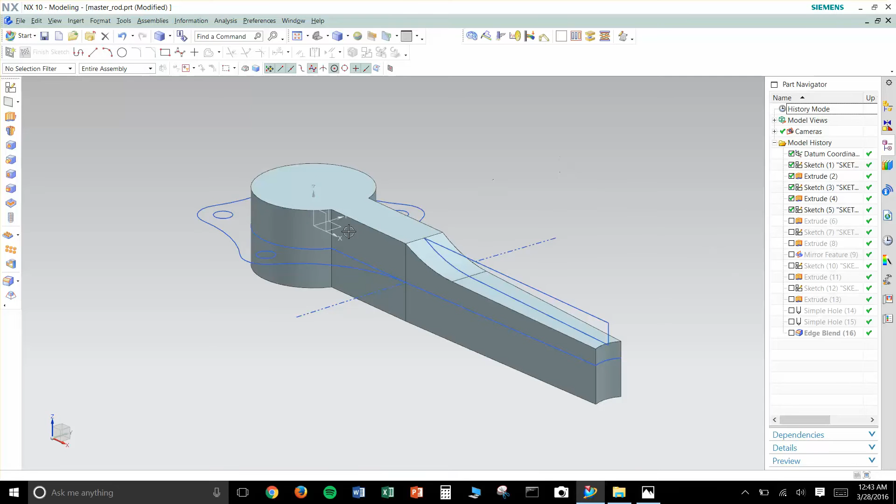Then I draw my third sketch, and this is the most difficult out of all the sketches you have to draw for this piece. But it's really not that bad, I promise. From here, I pretty much catch my breath, and then I just extrude it.

Then I draw this inner sketch, which is embedded in here, representative of this. I subtract that out of this piece, and then I mirror all these things. So I mirror this cut, I mirror this little pocket cut here, I mirror this piece here, and that's what I end up with so far.

And then let's see, this sketch - what is this sketch? I think this sketch is just a circle. And then I go ahead and extrude that. I draw another circle here, extrude that, and make sure - like when I'm extruding these, I'll show you when I actually go through it all - but when I'm extruding these, I'm attaching these pieces to one another by uniting them, so make sure you do that.

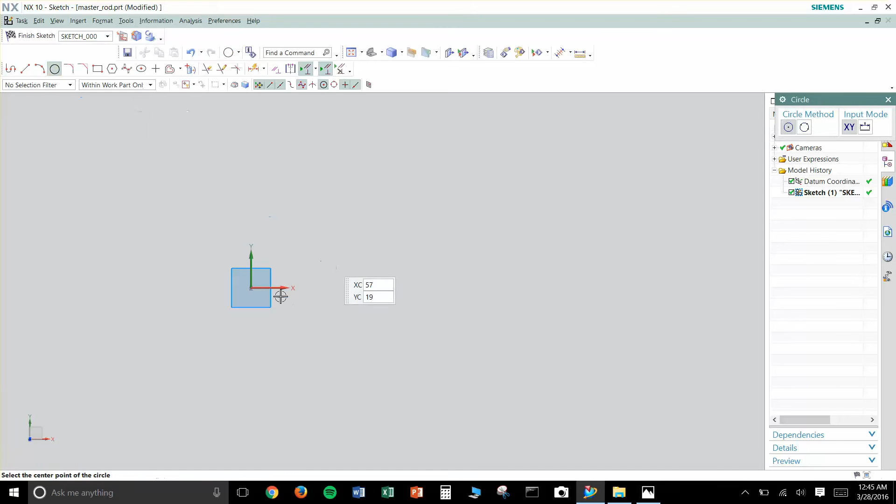If you watch how I do it, it makes things a little bit easier. But depending on how you want to do it, you could do it however which way, but as long as you end up with the same result, that should be fine.

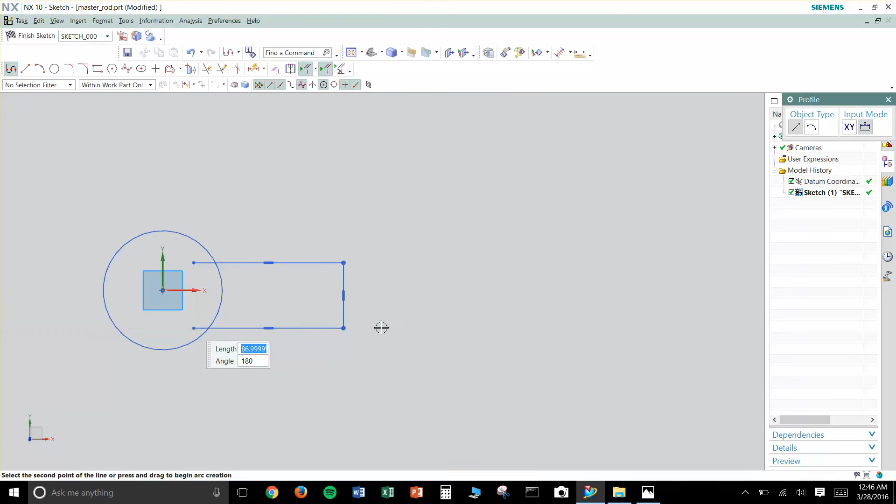So I start with the circle here. I don't put any dimensions on now, mainly because I know once I draw this out, I can change them later on. So all I'm drawing is just a few lines here. And then the last thing I'll draw here is a circle.

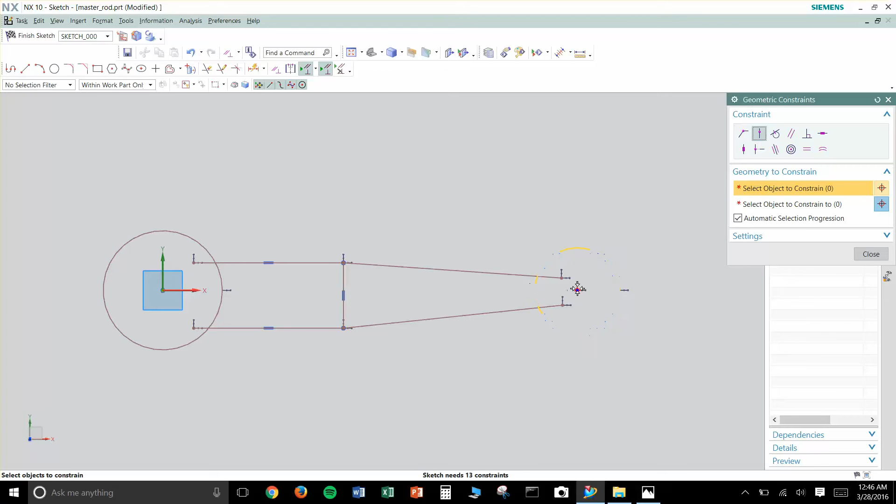First thing I want to do is go into my constraints and get some things aligned here. I want this circle to be in line with this x-axis here, and so it is. Next thing I want is to make something symmetric about each other, so I want this line and this line symmetric about the x-axis, as well as this line and this line.

These arrows that came up a little earlier, they do matter. So you can't select this line with this arrow over here and this line with this arrow over here - it'll mess things up, but if you haven't figured that out already.

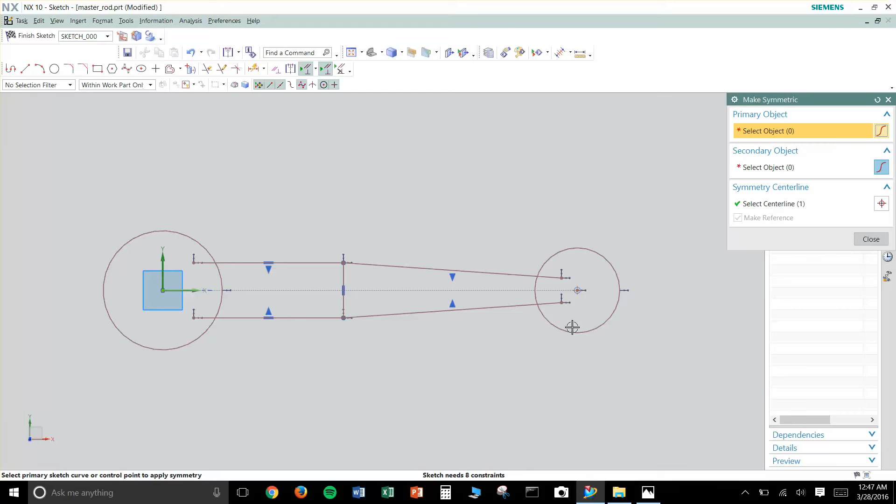And this is where my handy trim tool comes in. You could just hit T on the keyboard and that'll bring it up too. So I don't need that, I don't need that, I don't need this, I don't need this, or this.

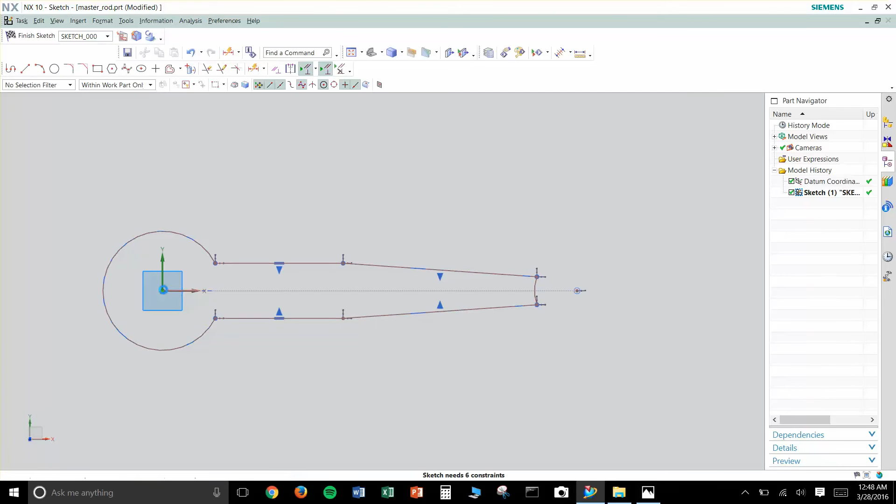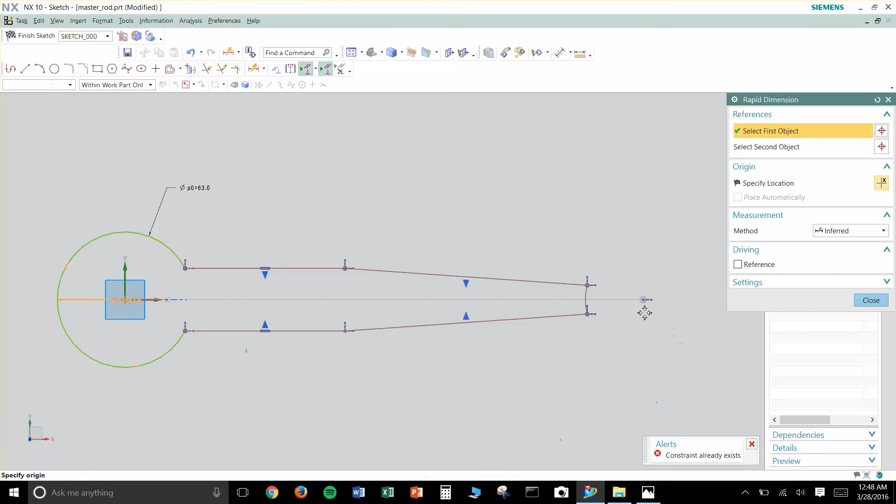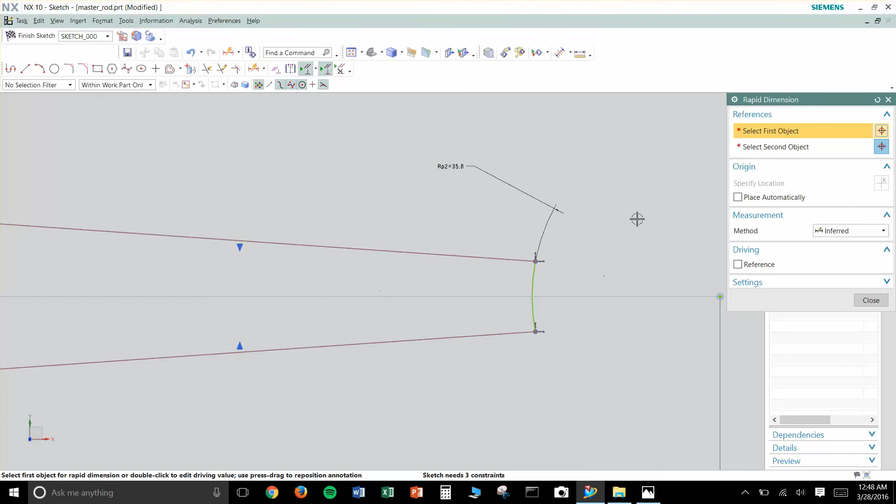I know that this circle that was once here, if I click on this, it'll bring it up. The radius of that circle, here we're given a diameter, so it's just that 35 divided by 2. So literally I'll just type in 35/2, and that'll give me 17 and a half.

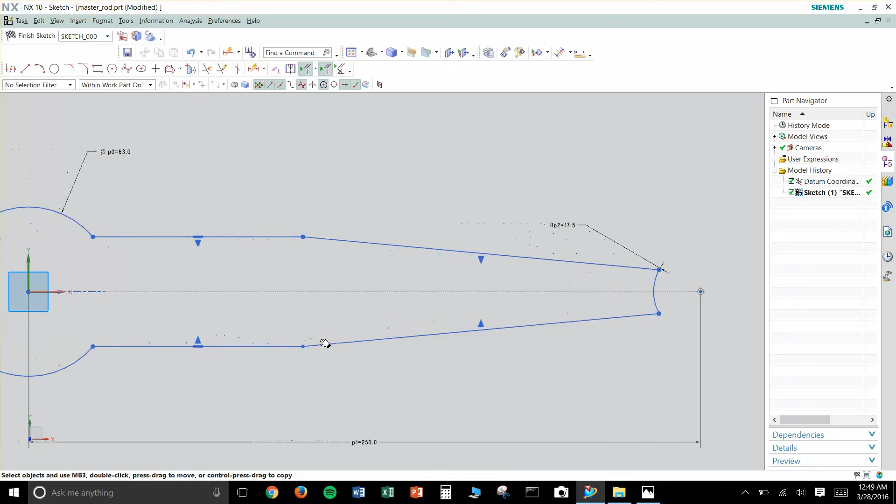Next thing is you can kind of move these apart like how I'm doing, and it might help you eventually, that way things don't go crazy if you apply a dimension. Sometimes that'll happen if it hasn't happened to you already.

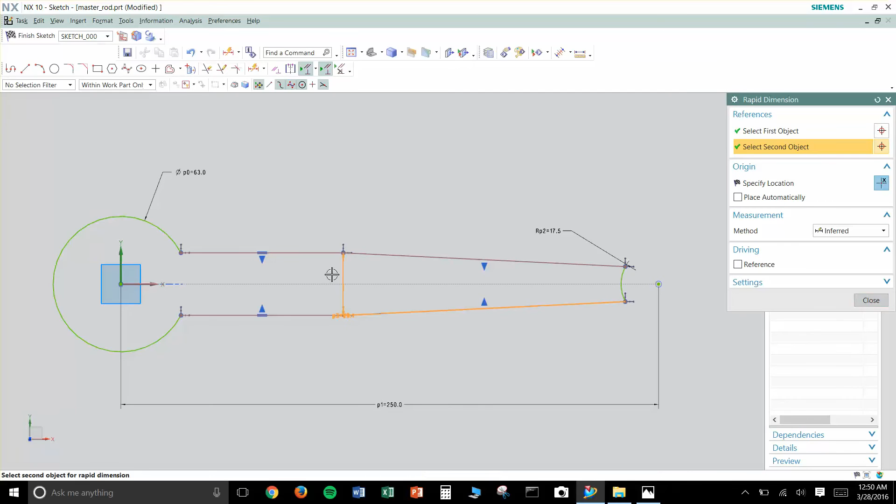The dimension though that I do get, not from the book, is this dimension here, the dimension that gives us this point to this y-axis here. And that I know is not 24... this dimension here, this is 24.

This dimension, like I said, it's not in the book. I really can't remember how I got this 24, but I remember back when I took the class, which was like 4.5 years ago, I was told that this 24 was correct. And I did get a good grade on the Radial Engine, so if you have really big concerns about it, I would go ahead and talk to Jim.

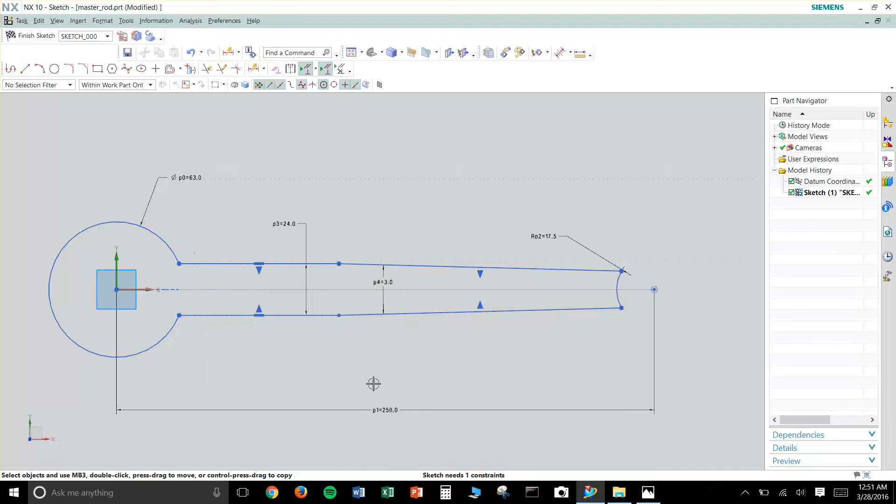But other than that, this last dimension should be 3 degrees. And my last constraint, I think it's that last dimension that I pulled, 88. So this 88 means from this edge here to that center, and that's 88. That means from this point to this y-axis, that is 88 millimeters.

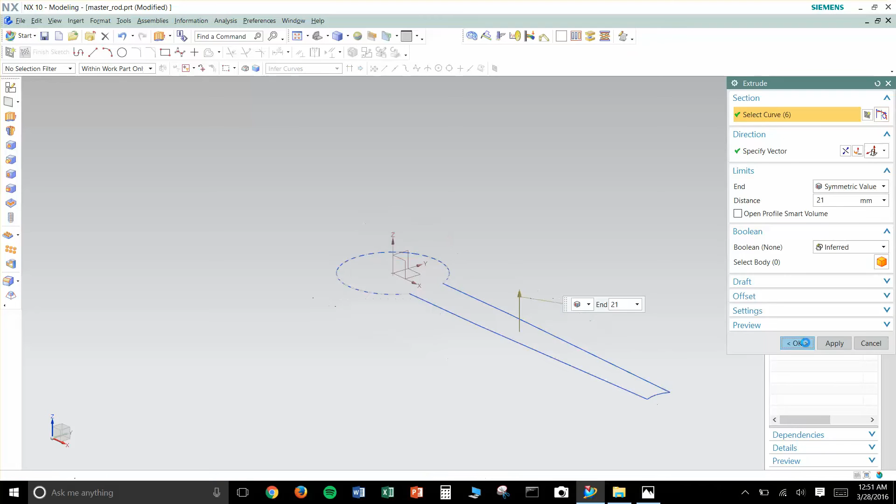And now my sketch is fully described, so I can finish it. I can extrude it. And according to the book, I want to extrude it symmetrically 21 millimeters, because I want the entire width of it to be 42.

And I can go ahead and draw my next sketch. My next sketch is going to be on the ZX plane, and it's going to be like that knife looking thing that's right here. So in order to get that...

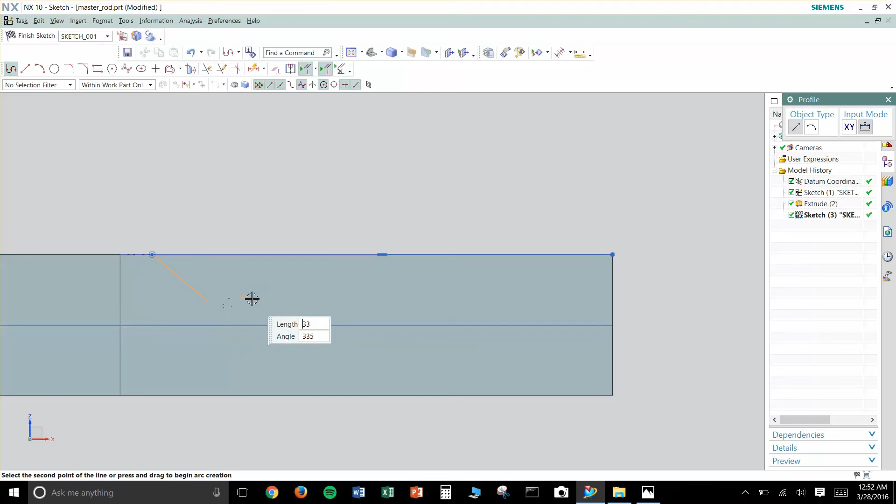I'll start with my profile tool, starting at this corner. I'll come maybe about to right there or so, and then I'm going to back out. And I'm going to use my arc tool, about right there, so I get an arc about roughly looking like this. Oh, that's weird.

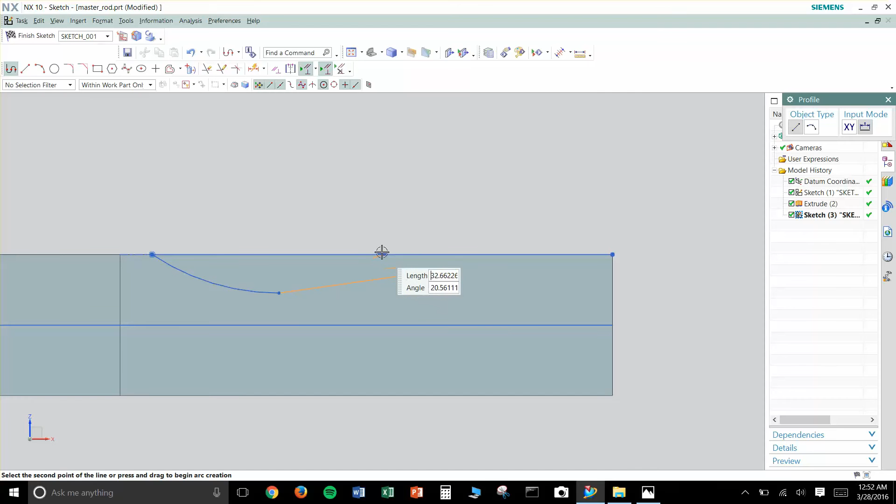Then I'll continue this line, but I want to continue it at an angle. I don't want to continue it straight, because if I continue it straight and click, it's going to make this horizontal constraint that this line has. So I want to make it at an angle like this. For whatever reason it applied it anyway, so I'm just going to delete it and drag it down. Yeah, but right there is good.

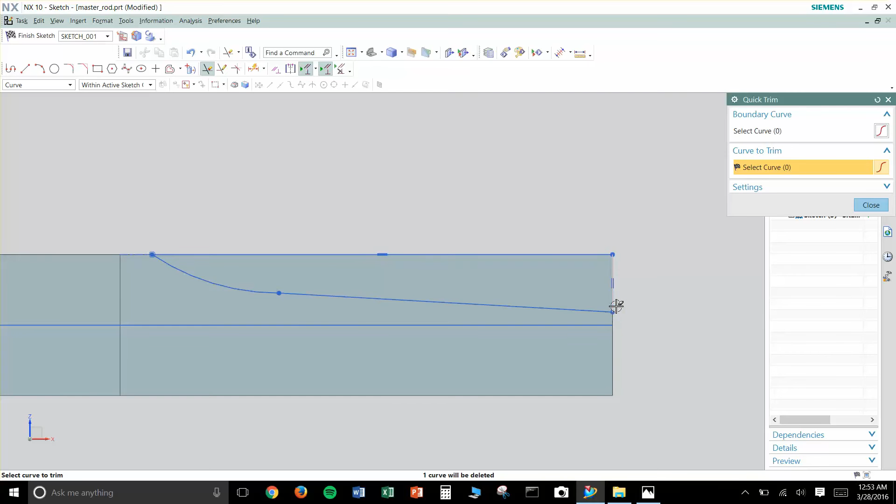I'm going to start from this original point, come down, and then I want to trim this piece and this piece, so now it's kind of closed here. The first thing I want to do is go into my constraints and make this arc and this line tangent to each other. I couldn't remember the name.

So I have that this arc here should have a radius of 78. And I will also use this 2.5 here.

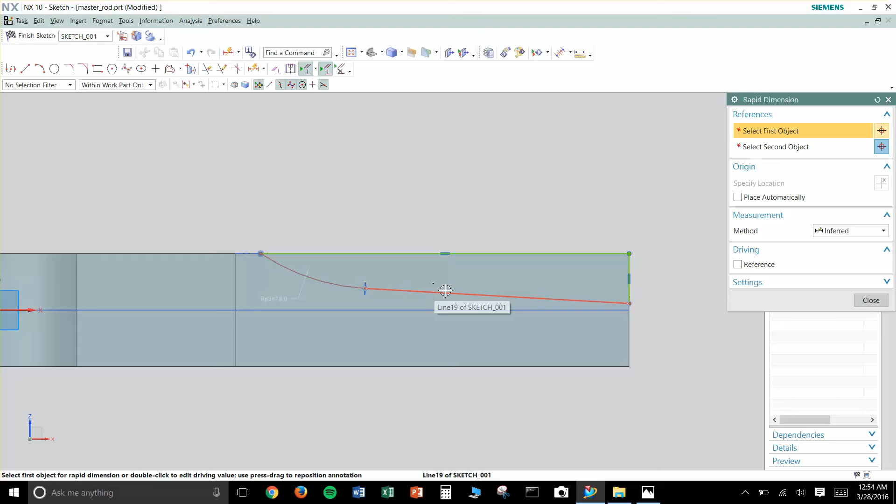So if I make a dimension that pretty much goes from this, an angular dimension, sorry, that goes from this line to something that's horizontal, I can use this 2.5, but this 2.5 describes both sides here. So what I want is half of this 2.5. So it does have a slight, an ever so slight angle to it.

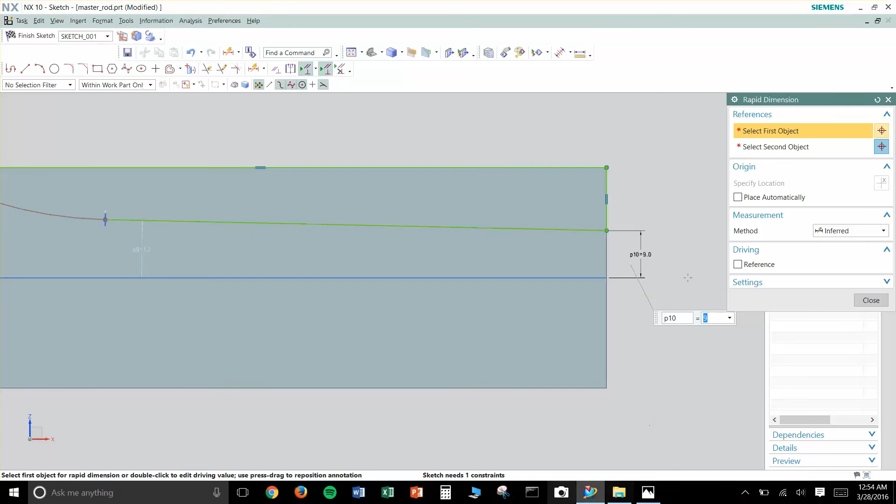This dimension here I know is going to be 9, and I know that from, this was also kind of confusing, but I got it from this here. So I'm kind of assuming that this 18 is described at this corner here. That was another kind of issue with these drawings, and as you know, many other issues occur in the book as a total.

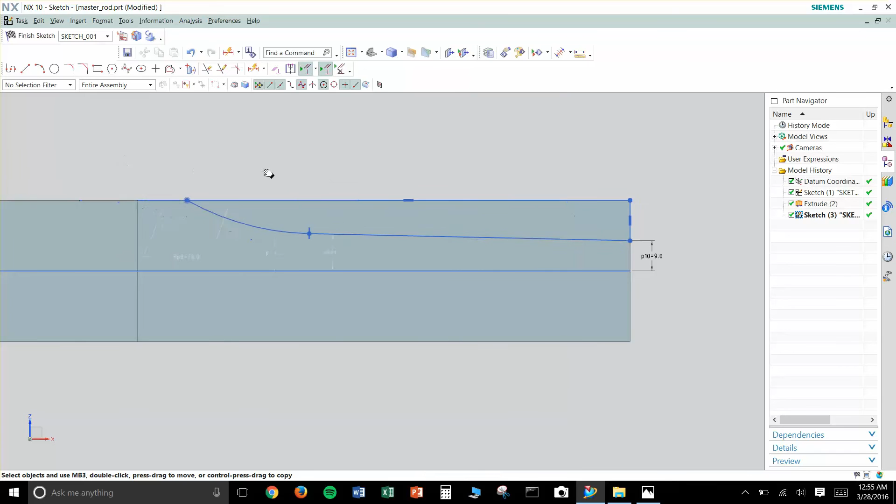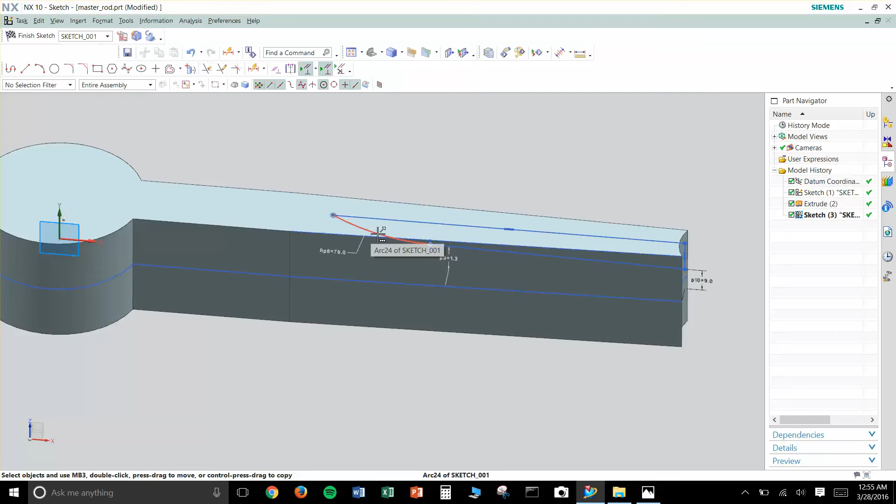I believe this point here, where it starts curving, is the same as that point here where I described the 88 in the last sketch. So what that means is I need to make some stuff coincident. I need to make this point here and this point coincident, so it'll pretty much drag all this left. Once those are coincident, my sketch is fully constrained. I can finish it and extrude subtract from my bigger piece.

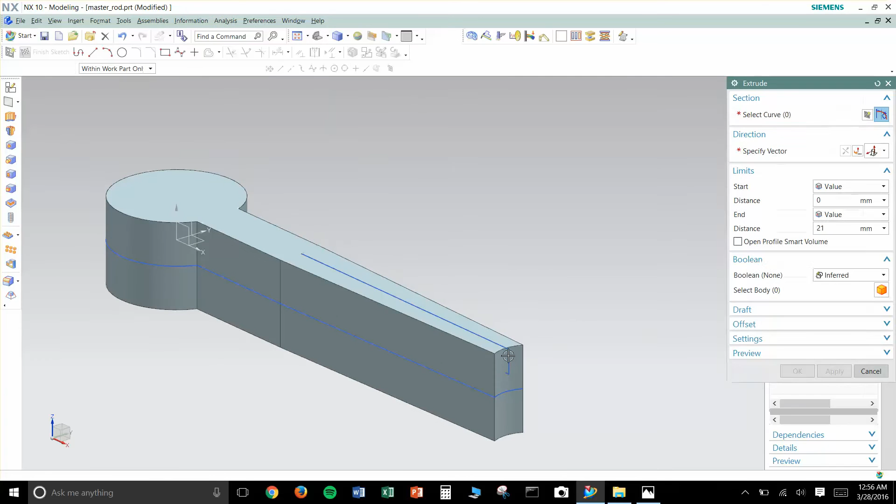This really doesn't matter, right? Because you're just subtracting. As long as you subtract from that main material, that's all that really matters.

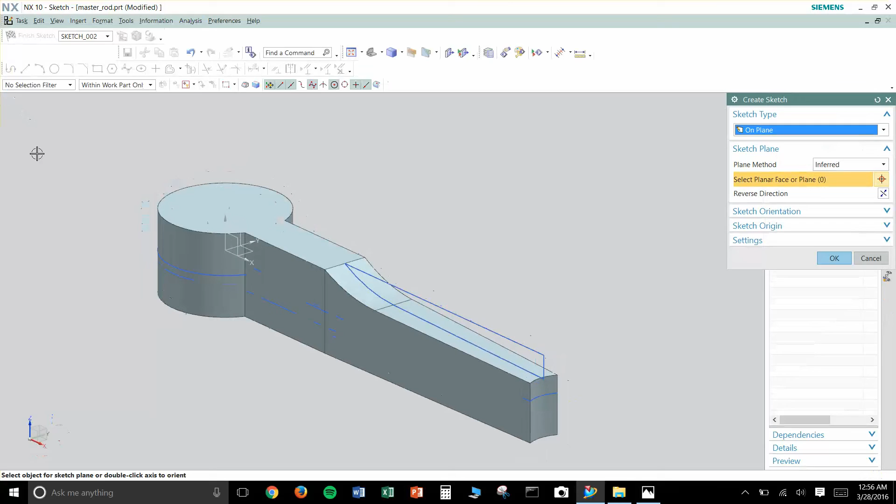Next piece, I believe, was the sketch. Let's see, the sketch that was a little bit more difficult, and that's on the XY plane. So if you can hear background noise, I'm sorry, I think it's my roommate.

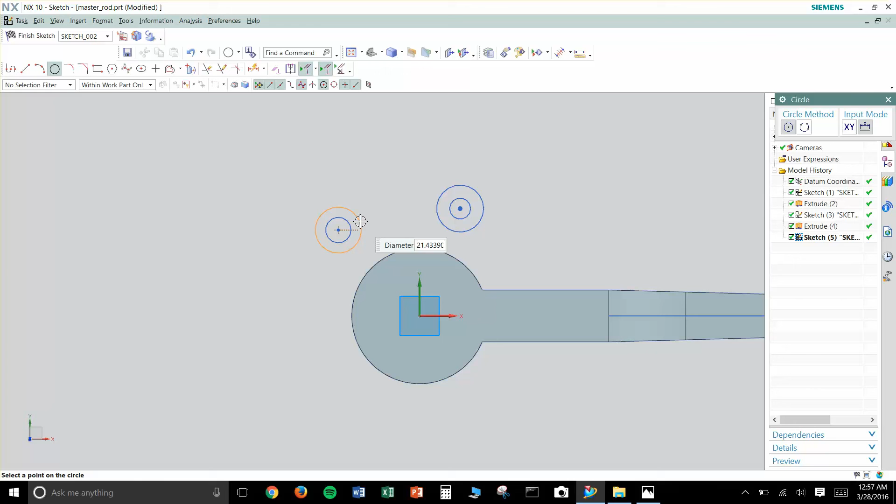Okay, so the first thing that I do is use the circle tool, and I'm going to make quite a few circles here. That one's like really small.

I'm not worried about the size right now because I can change that later on, as long as you don't make inferred constraints like this one wants to make here. All these outer circles are going to be the same, and all the inners should be the same - same diameter.

So I can go ahead and apply that with the constraint of equal radius. If I don't do automatic select, I can click one, go down to the other, and click the last two. As long as they're all equal, that's fine. Okay, so they're all equal.

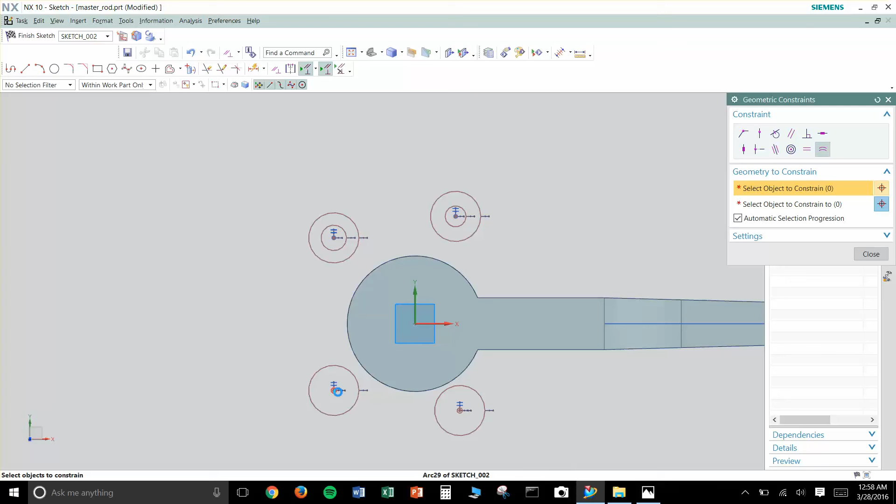I think that was a bad idea to start with that circle. Okay, so as long as you have something like this, that should be fine.

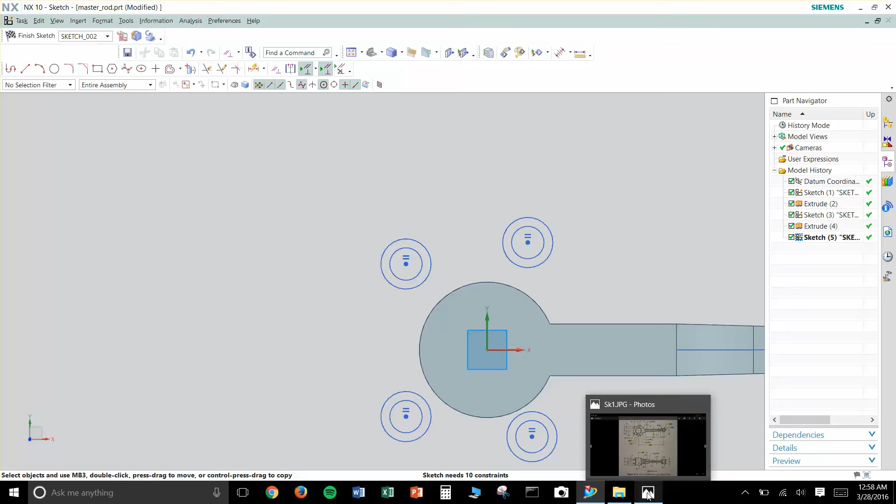The next thing I want to do is apply some constraints as far as the positioning of these circles. The outer one and the inner one share the same center position, so they are concentric essentially. That's something we needed for those circles.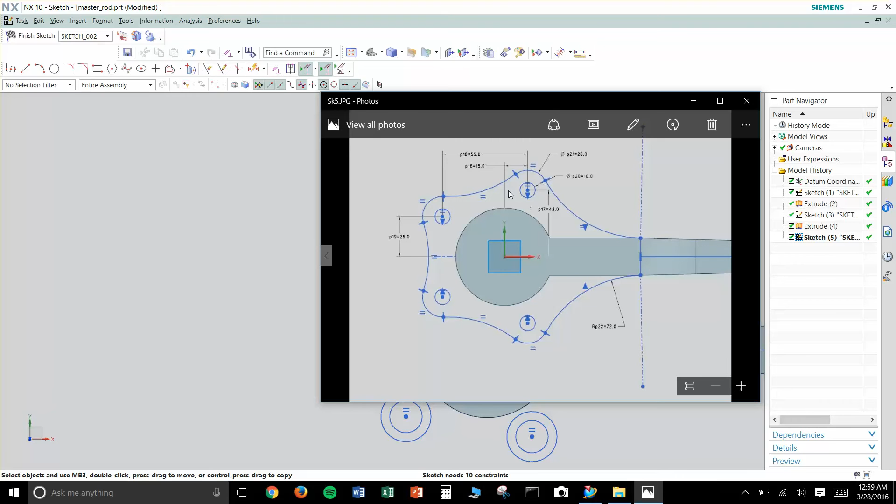So here's pretty much the sketch with the dimensions. I see I have a 55 here, 15, a 43, and a 26. So I will first apply dimensions to these two circles here - 43 and 15.

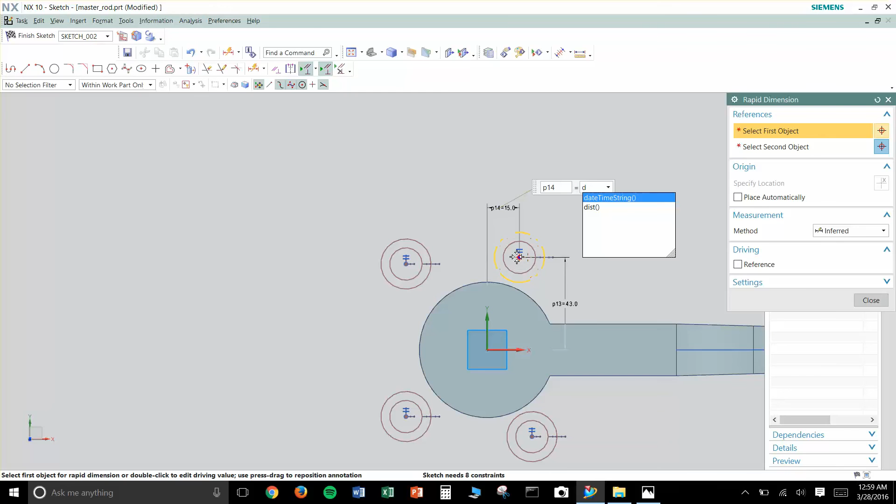I think I kind of messed up here. And then if I remember correctly, this was 55 here, and this was 26.

I want to do things too fast, and it's not keeping up. So this center here, and this X - and that was 26.

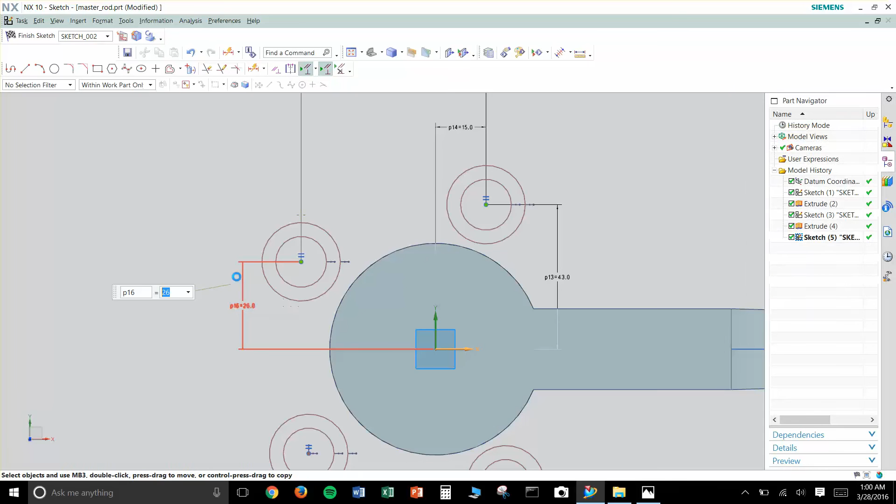Okay, so if I apply some symmetry, I can get everything to be constrained. I'm going to add more stuff here in a while, but it'll help me get things aligned. So these two here, I want them symmetric across the x-axis.

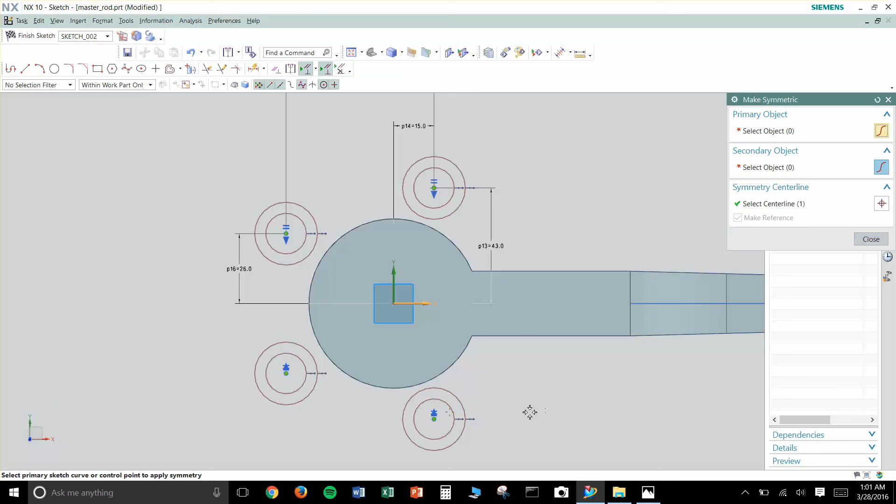Keep in mind it'll select the same center line for you, so everything I click from now on is going to be mirrored or symmetric across the x-axis. So this center here and this center here now automatically align.

My sketch is not constrained yet, and my two missing constraints are just the diameters of these here. This outer one is 26, and the inner one I think is 10, yeah.

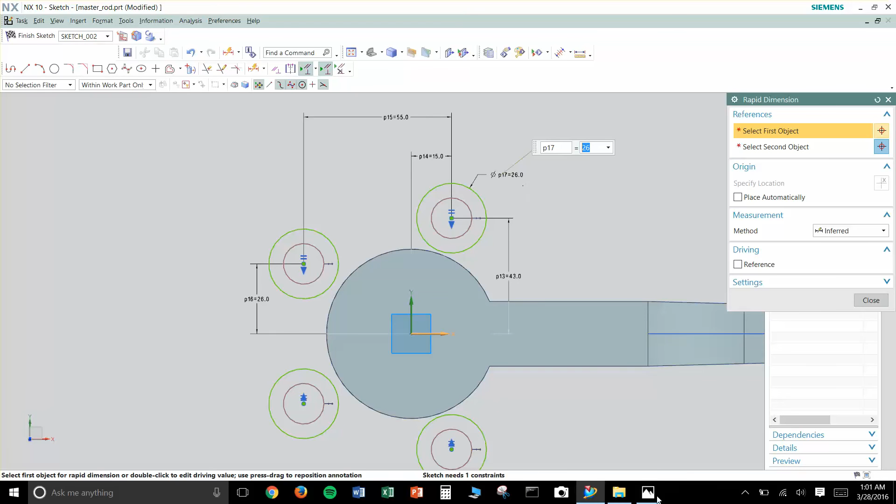Okay, so the sketch is fully constrained.

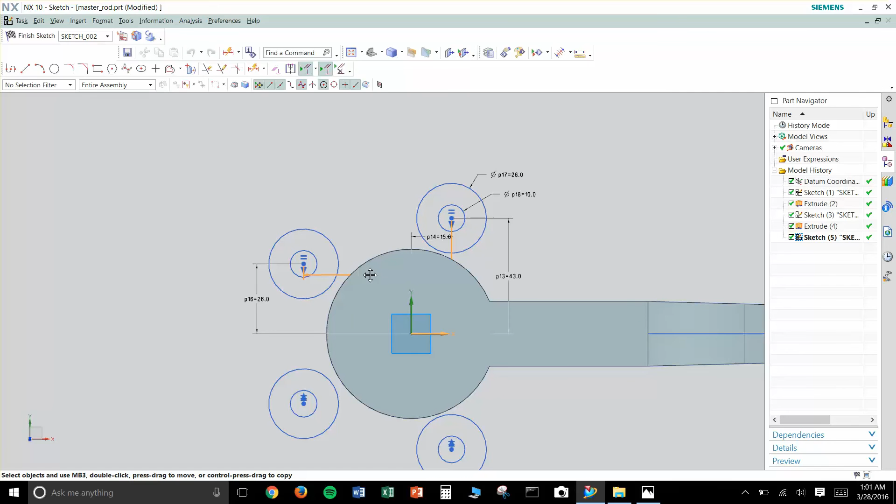I still have a few more things I need to do, and this is probably where it gets a little tricky. What I'm going to do is clean things up. I know these constraints are done, I know what they are - I'm just going to bring them into the center so they're not in the way of anything else I do. I know they're fine, I know they're set and correct.

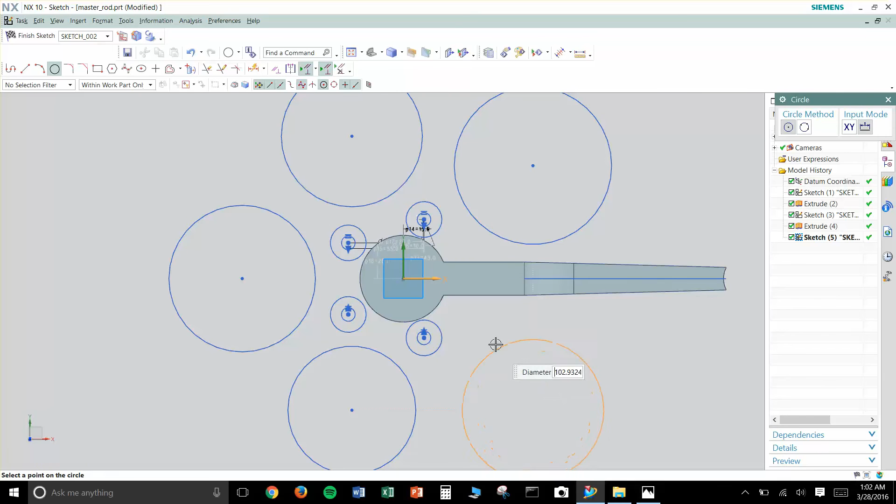So here's pretty much what I'm going to do: I'm going to make a number of circles on the outside, and I'm going to make a line from this point here to this point here.

And then I also need a line from here to here and from here to here. So these lines are arbitrary, these two lines. And I'll also trim this because I won't need that.

Okay, so now I'm going to use my constraints to fix everything, and you'll see how I do it. I want this circle and this circle to be tangent, this circle and this circle, and I'm going to go all around and do the same thing to all these other circles. You can probably already guess what I'm going to do, but pretty much I'm going to trim a lot of this stuff.

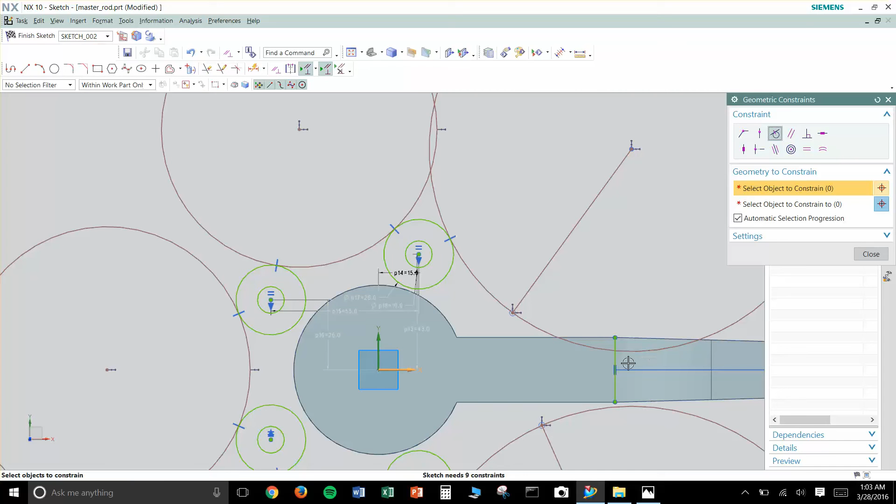Now this part is pretty important because I can't just use a tangent here. What I'm going to do is make some points coincident, so I want the end of this line here and this point here coincident.

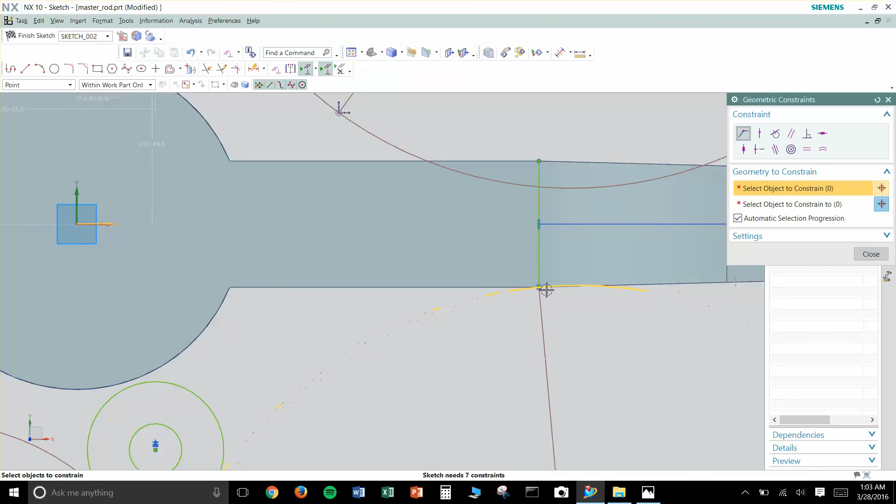So now they're officially touching, and when I trim this, they'll be officially touching here. Then I want to make this point here and this point coincident, and I pretty much have the piece that I want. So now I can go ahead and trim a lot of stuff.

Before I do that, though, I want to apply some dimensions here, and I only need one because I think about 5 of these have a diameter of 72, or I'm sorry, a radius of 72.

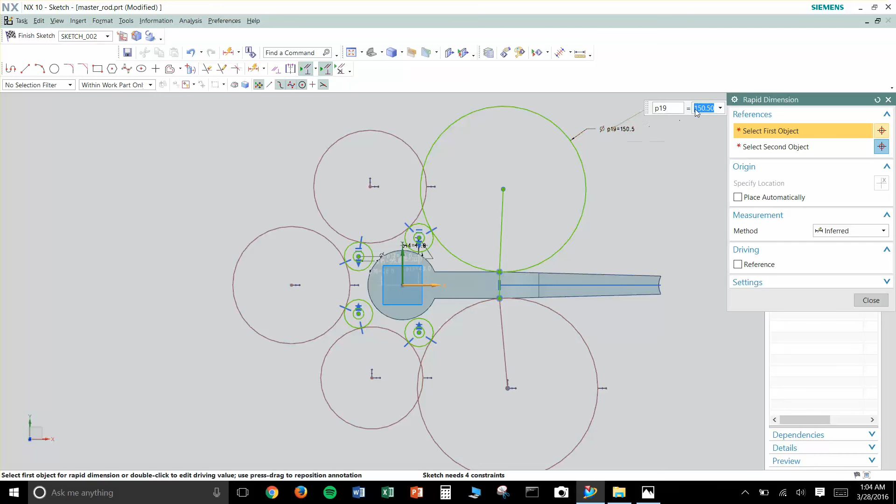But I have a diameter, so I want 72 times 2 if I'm describing a diameter. And I want to make all these equal to each other.

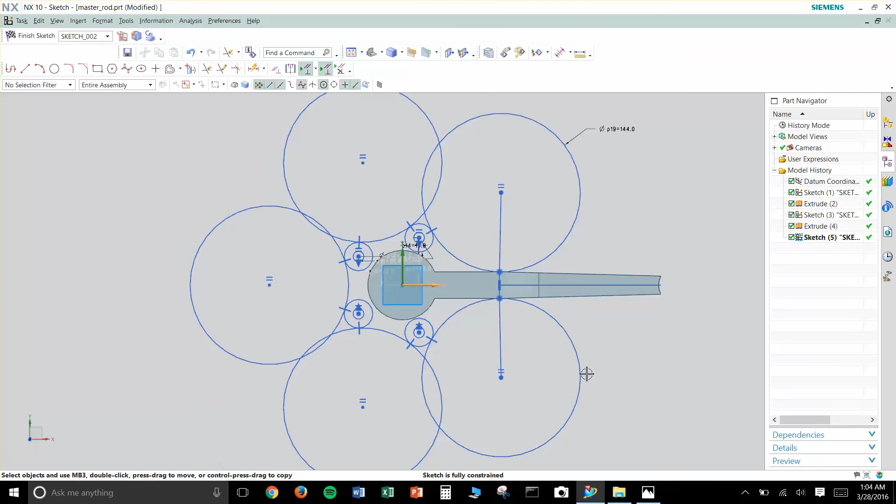My sketch is fully constrained, and once I go ahead and trim a lot of this, it will still be fully constrained, but I have to be careful what I trim. So I don't want that, I don't want that. I do want these lines here.

What I'm going to do later on with them is pretty much just make them into reference lines. I don't want these here, and I don't want this, this, this, this. You can just draw through what you don't want.

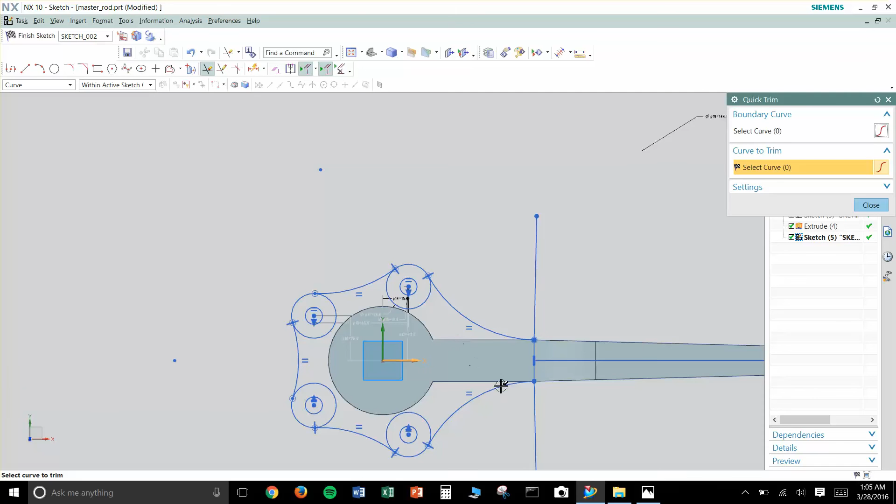And let's see, I don't want these inner pieces here. Let's see, and the only thing that's not constrained is...

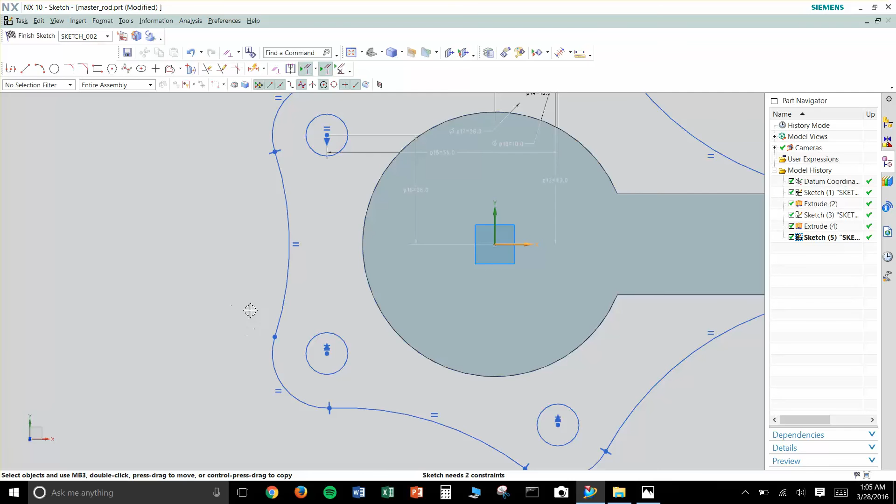Okay, in the event that this happens to you, you might need to zoom in to make sure that they're actually connected, and I think they are, but the only thing is that they are not tangent here.

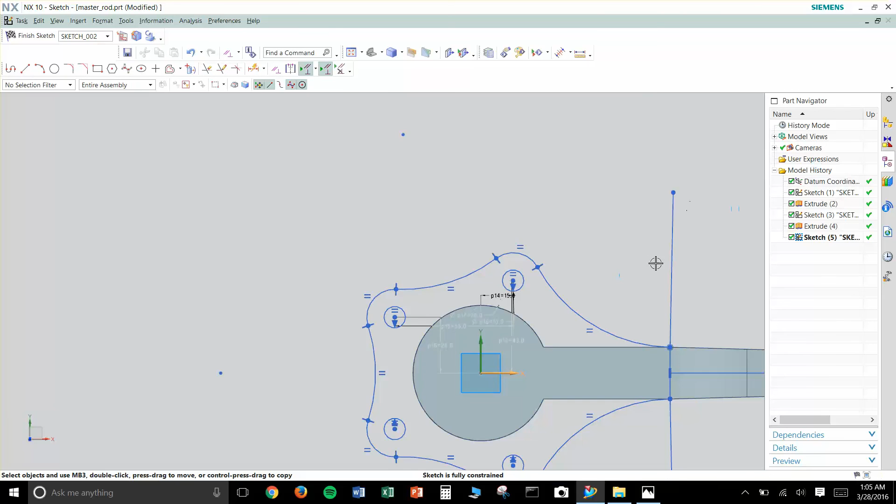So that one wasn't tangent, and that one wasn't tangent for whatever reason. Maybe I just forgot about it, or somehow it got deleted. But make sure all these are tangent here, so you'll see these little perpendicular lines here, and your sketch should be fully constrained.

The last thing I need to do is make these two lines reference, that way they don't show up when I go and extrude this piece. Once you have that done, you can pretty much finish the sketch and extrude it.

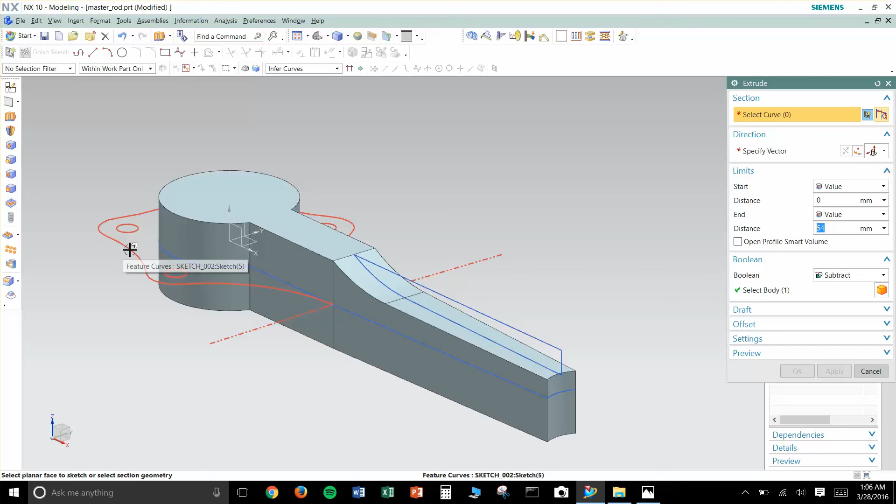So you'll start, I have my notes here on the side. You'll start at a distance of 14 and end at a distance of 21. Make sure to unite to this body here, hit OK, and you can start on your next sketch.

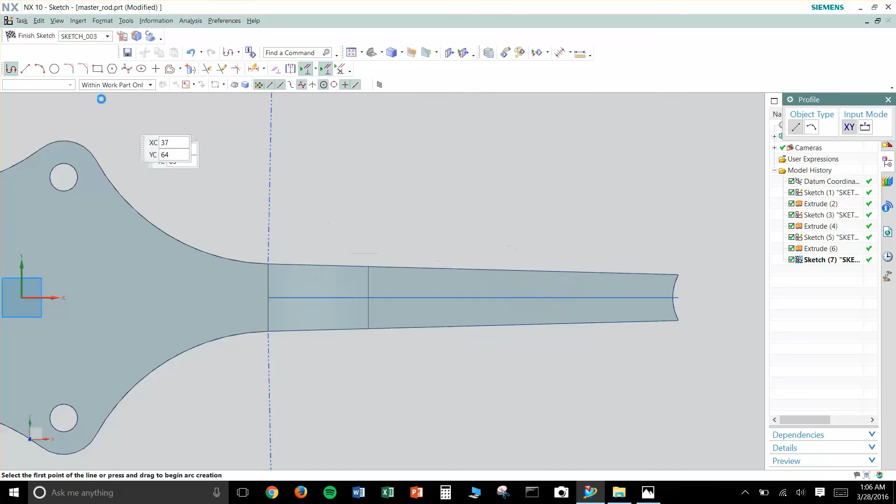So your next sketch will be on the XY plane. It's pretty much like that little trough thing. So just two circles, I'll start at the end here.

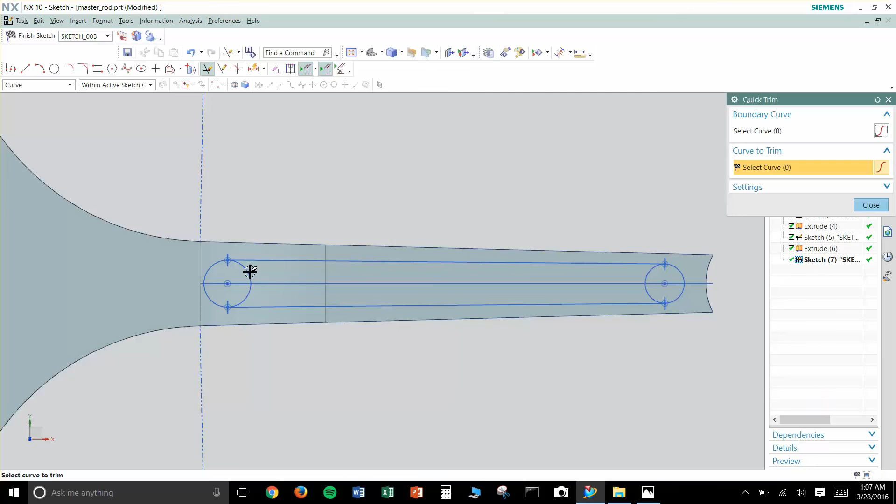I'm going to trim this inner piece here. I'm going to make these circles of equal radius, and let's see, they'll have a diameter of 12 due to this here.

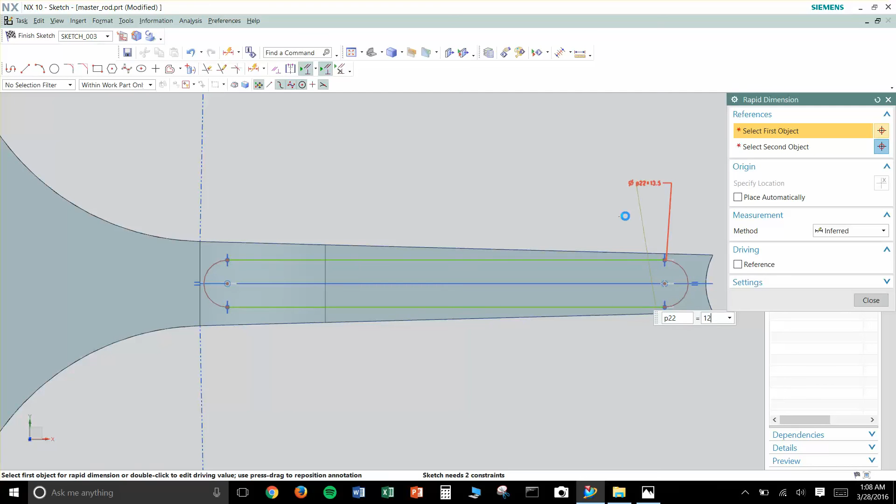And then I'll just grab my other dimensions from it too. So I know the width of it is 150 and it's 30 millimeters from this center hole. So I have my center here.

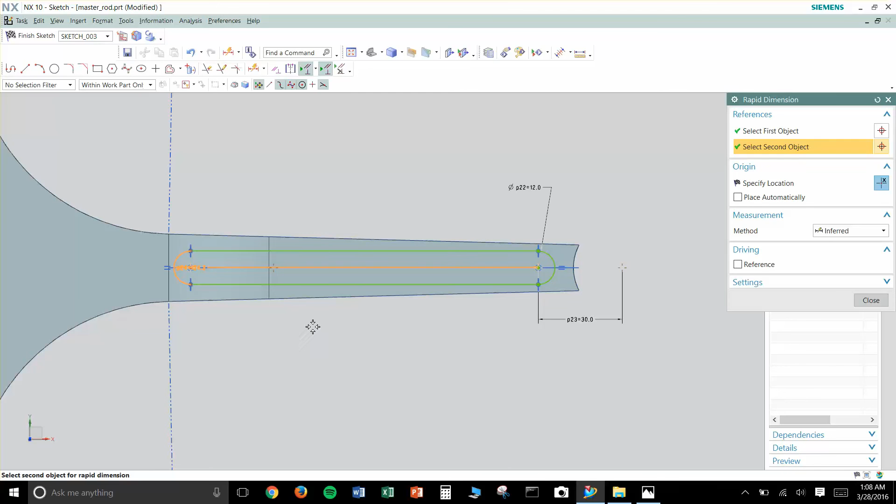So I'm going to pick this center line and this center, and that's 30. And this center here and this center here, and that is 150. Because I drew on this kind of center line here, my sketch is fully constrained, so it goes along the x-axis.

So if you didn't draw on this center line here, then you'll have to make sure that this center here, the center of this circle here, is a point on curve of this x-axis, and the same thing for the center of this circle here.

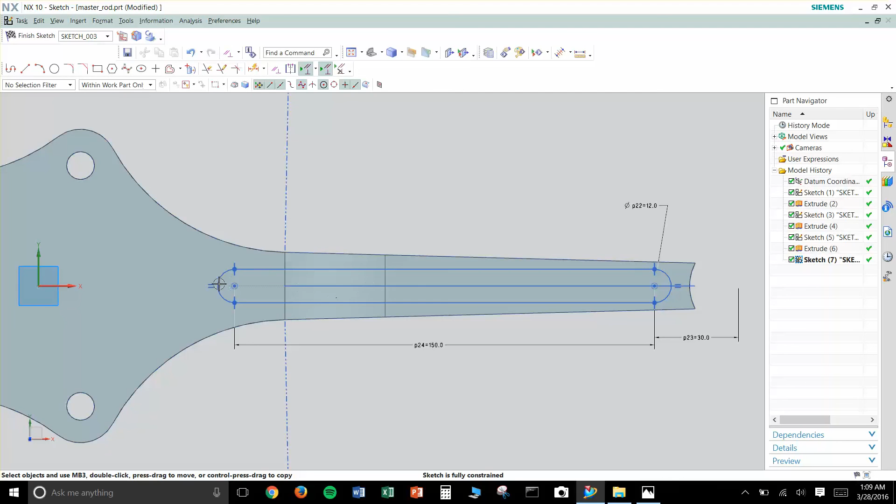So you can kind of cut it in half. Like if this x-axis were to run all the way through, it would be exactly half of this trough looking thing. So I'm going to go ahead and extrude this here.

So in the center here, there's only 5 millimeters. And I want to extrude the last sketch here, so I can just select the sketch.

So if I leave 5 millimeters in the middle here, where is it? Right here. Then, taking into consideration symmetry, I will start at a distance of 2.5, and then I'll just go until selected, and that'll be, I'll say, this face.

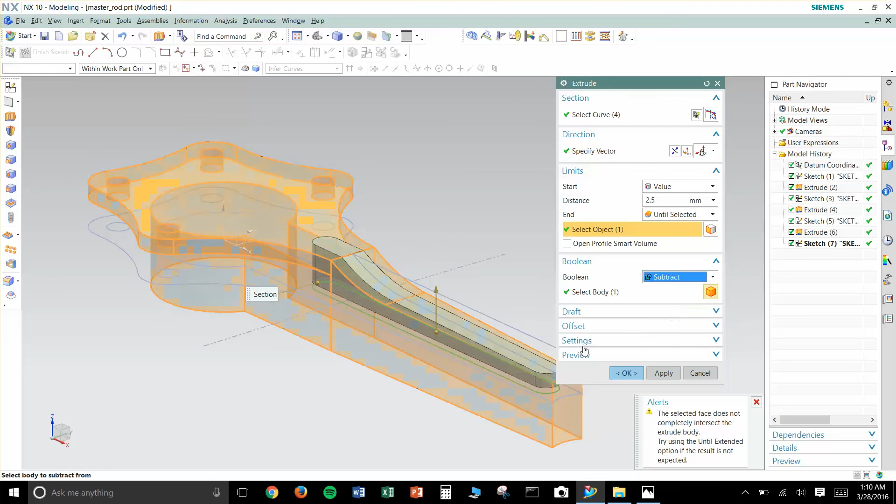So it's going to subtract all this material. Let's see if that even... I'm just going to select value, and it might give you a hard time if you select until extended, until selected, or until next. But yeah, so that cut's now done.

Next thing you want to do is mirror these features that you created to the other side of this main piece here, that main first piece that we made. So I want to mirror this cut here.

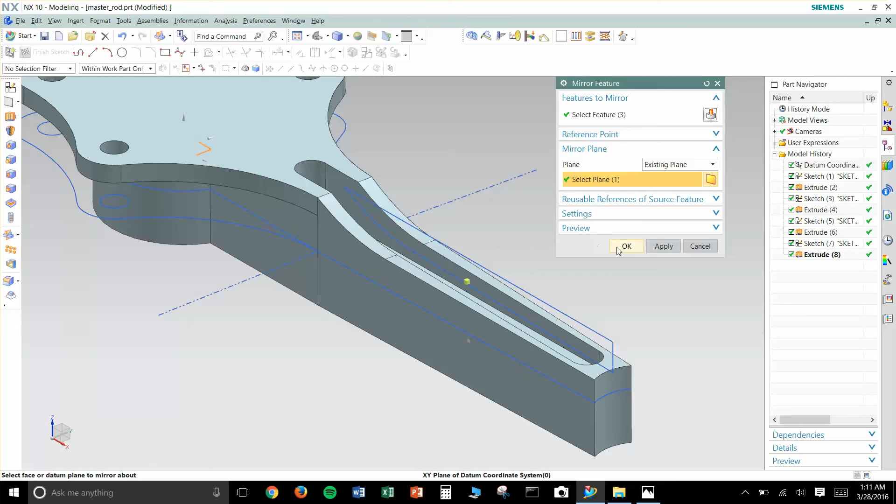I think it's this extrude. Oh, there we go, select feature. So this extrude, and this extrude, and I want to mirror it across the XY plane. And it's pretty much done. So now I can draw my other two circles here.

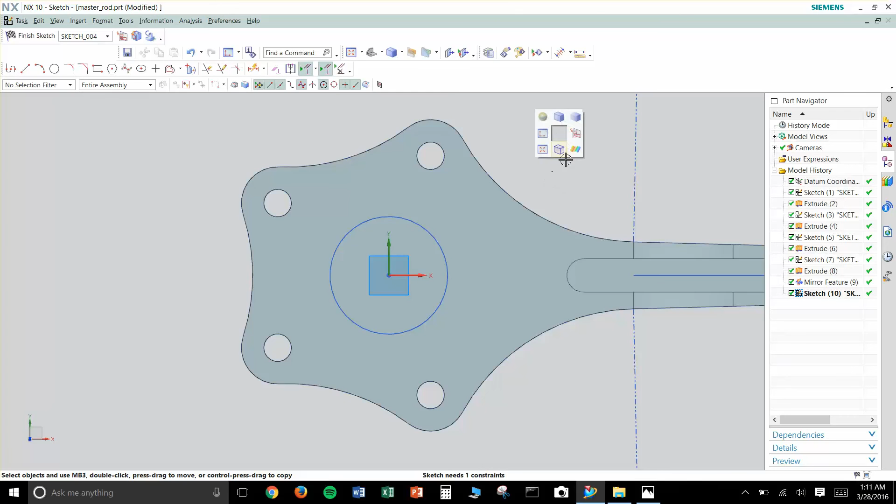So it does share the same diameter as this inner circle here. In case it's not prompting you to select it, it's kind of already wanting to match it there. In case it doesn't let you do that, you can just click wherever, go into wireframe, and drag it out until you hit there. Your sketch should be fully constrained.

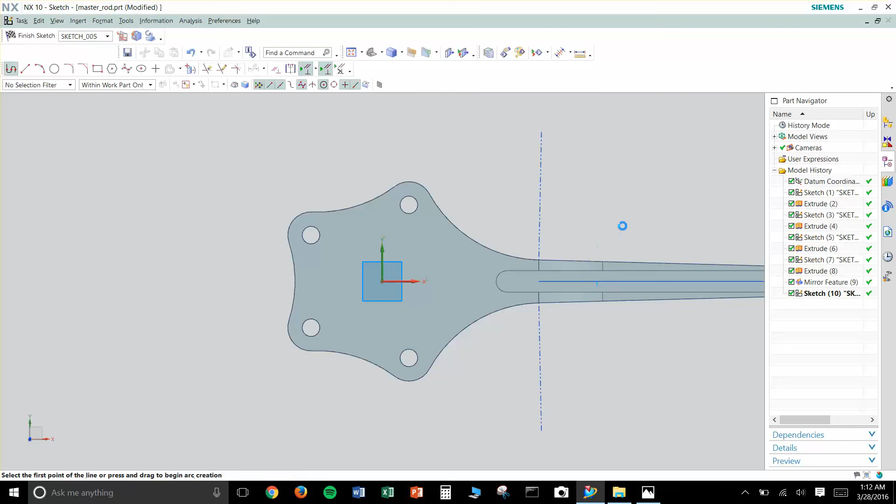There is a reason why I do them separate, like that bigger circle and then this circle that I'm going to do next, because they are definitely different - how you extrude them is different, I guess. The values of which you extrude them at is different. So the sketch is fully constrained.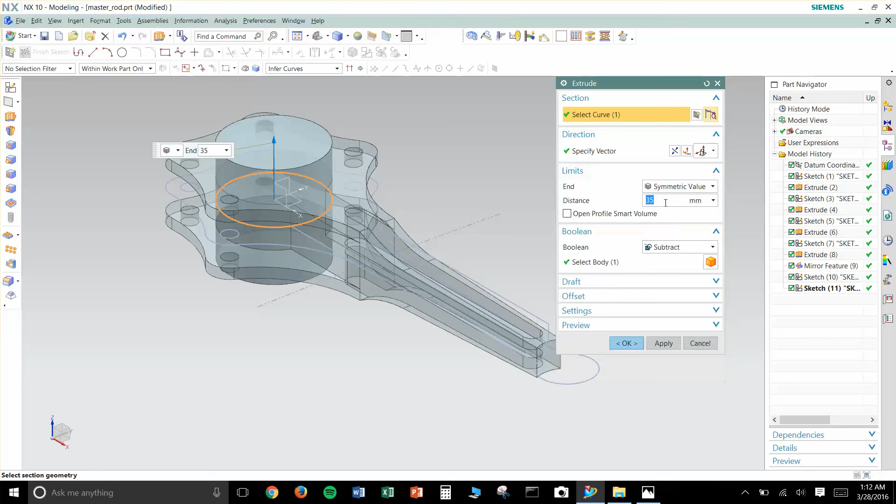I'm going to finish it. I'll extrude my first sketch, and I will extrude it 35 millimeters symmetrically. Make sure to reset this to start at 0 - or well, that doesn't matter. I will unite, and then I'm going to hit apply.

And then my next curve that I'm going to extrude is that second sketch here. I want to also symmetrically extrude it, and that will be 21 millimeters, and unite it to this body. Then I'm going to hit OK, and from here I will start on my simple holes.

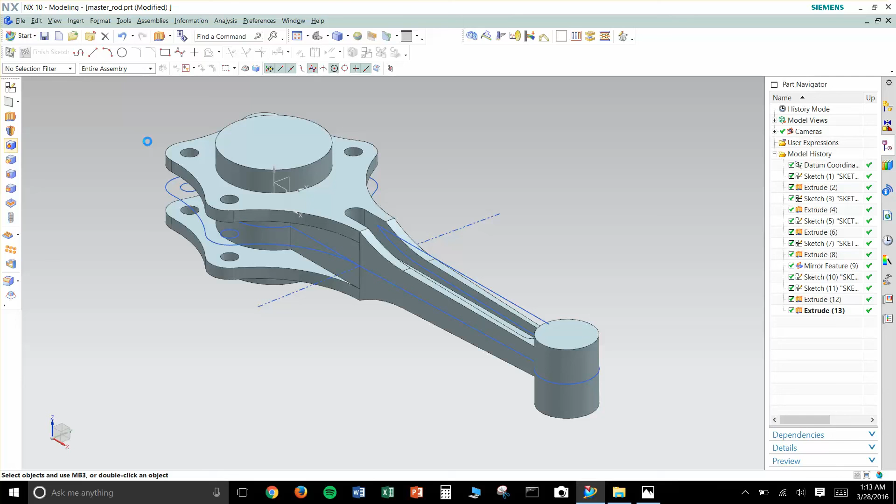If you haven't figured this out yet, when it prompts you to select a point, and you click on the rim of whatever circle, like if you need to make a hole on a cylindrical surface, you can select the rim of it, and it'll already place that hole there.

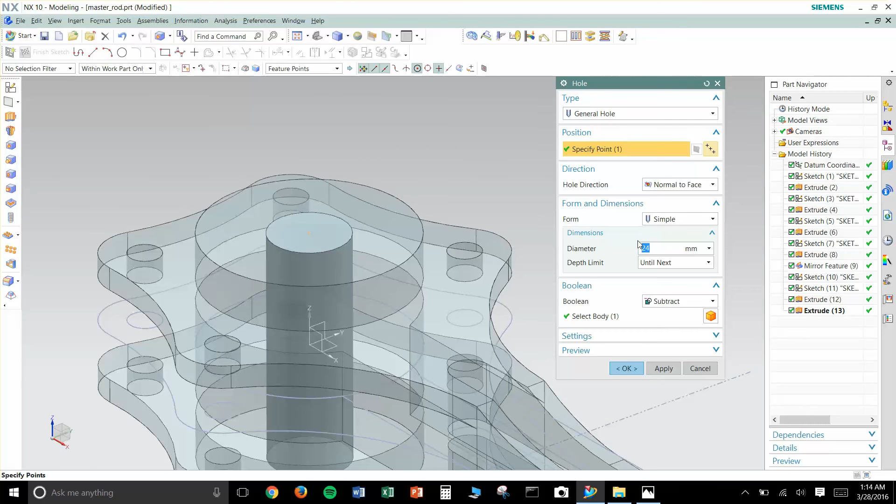So my depth limit is until next, and let's see, this hole will be 52 millimeters in diameter. Apply.

Same thing here, and this one's going to be 24 millimeters, and until next, so it does go all the way through.

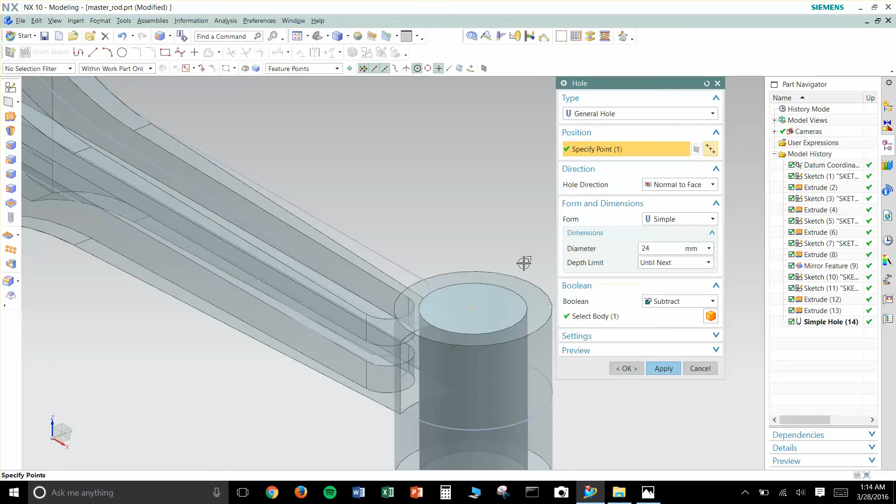And the final thing that you need to do is add some edge blends. In case you were confused why I didn't do this in the first place, this here, it's easier in my opinion just to do edge blends.

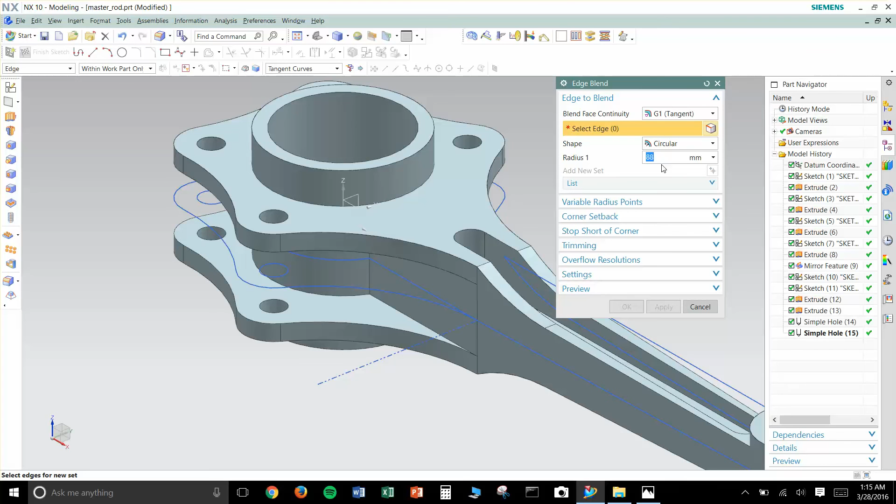So this radius here is 83. I hope I didn't mess that up - 72, 83, when I was drawing that other sketch.

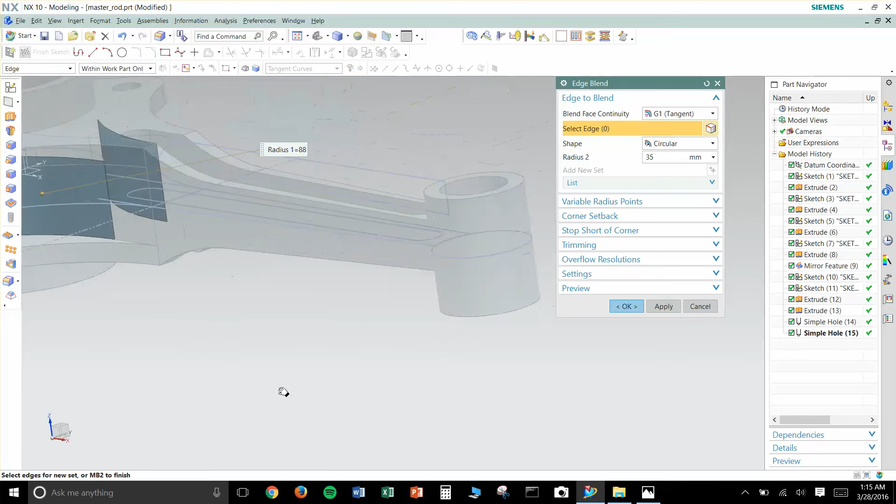Okay, so one there, and then I'll go ahead and hit add new set, and my new set is going to be for this edge here, which is 35 radius. So I'll enter 35, and then I'll select the edges here, and if I can turn this thing around here, and then I'll just go ahead and hit OK.

And that's pretty much it. Let me double check this here. Yeah, okay, I did put 72, okay. That's pretty much it. As far as another thing that I didn't do on the other master rod that I first showed you at the very beginning of the video, what I didn't have is a line.

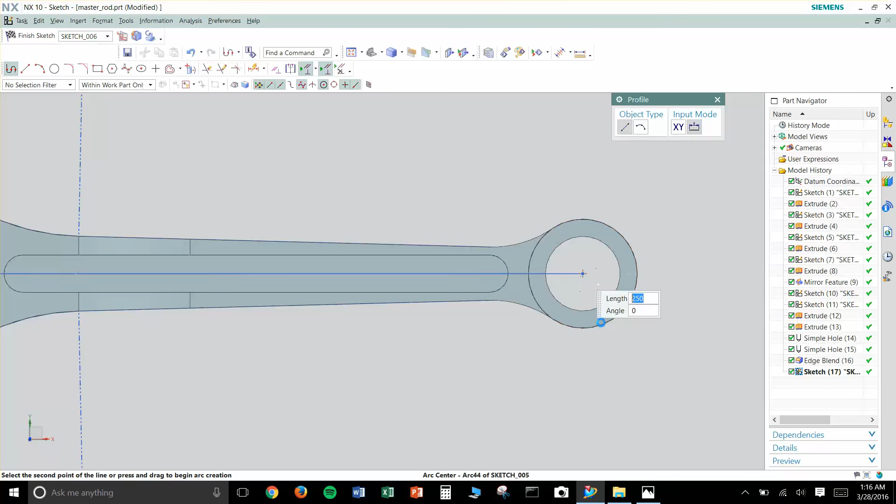This random arbitrary line that comes out and it ends - I want to end it right here. It doesn't really matter how long this line is, but oh, okay, I guess - that's kind of funny. It gave me a red because I put the end of this line at the center of this arc here. And so my sketch is fully constrained. That's kind of funny.

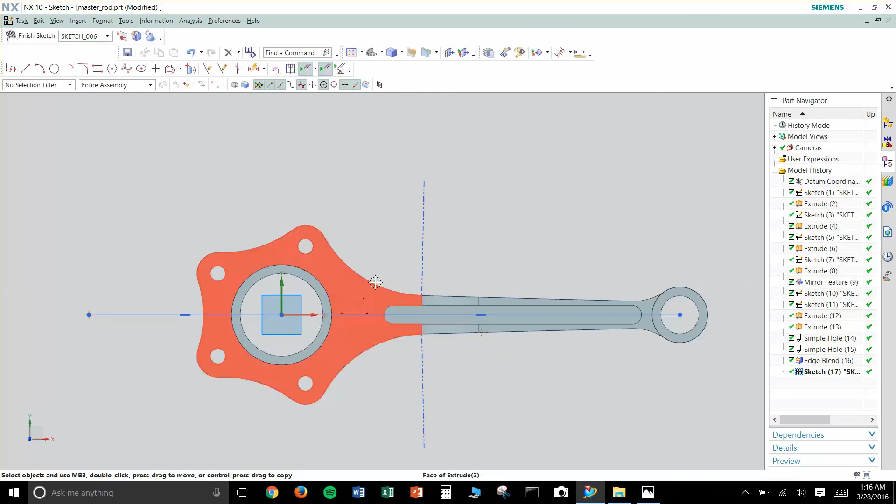I want to leave that sketch there because when you... actually, no, it's not going to matter, sorry. So when you're making your other pieces, which are these pieces, it'll be a good idea to make a line that goes just across, just a sketch, just like how I did here. I say that because when you look at it from the top, when you look at the radial engine from a top, and you're putting those other pieces, these pieces here.

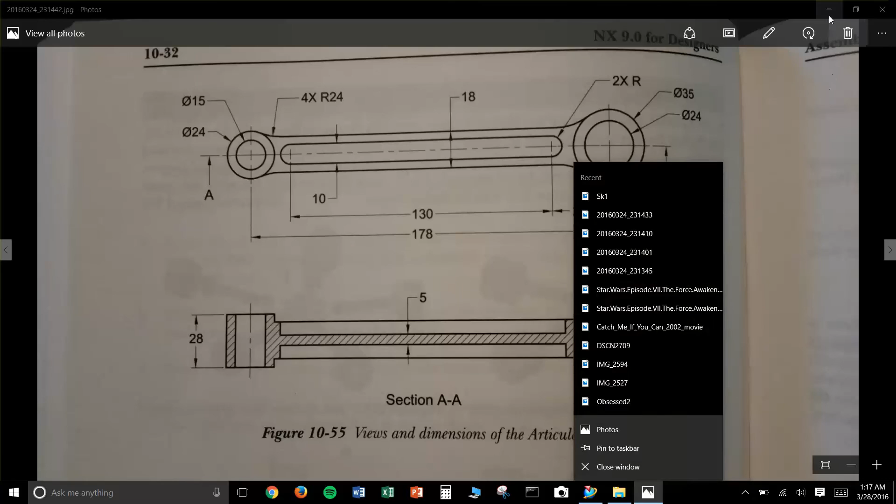That line can be used to give you an angle to help you reference when you assemble it. I'm having a hard time thinking of the right words to say, but if you have this line here, it'll definitely help you out in assembling it, and I think even this line that I drew here will help you out too. So I would really consider doing that if you haven't.

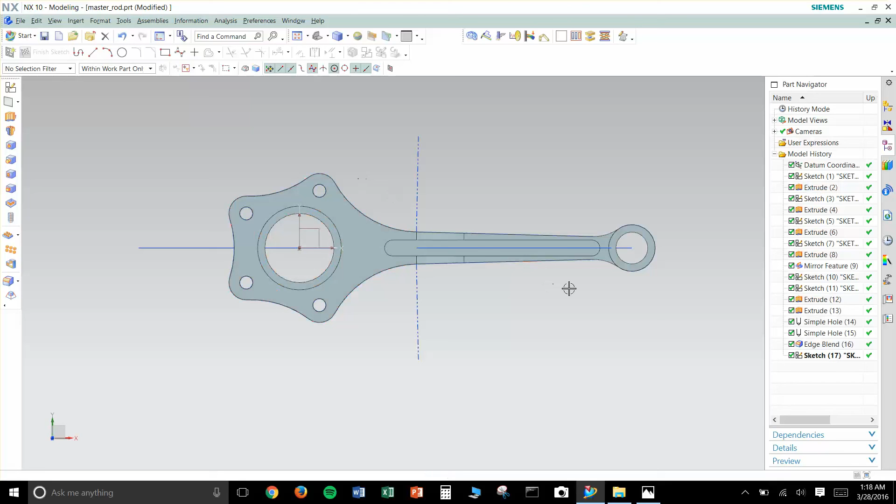I think that's pretty much it. So once you have it done, you can pretty much hide all the sketches and hide all the lines. That way it looks nice and gray and simple, and it's taking forever to load up. Okay.